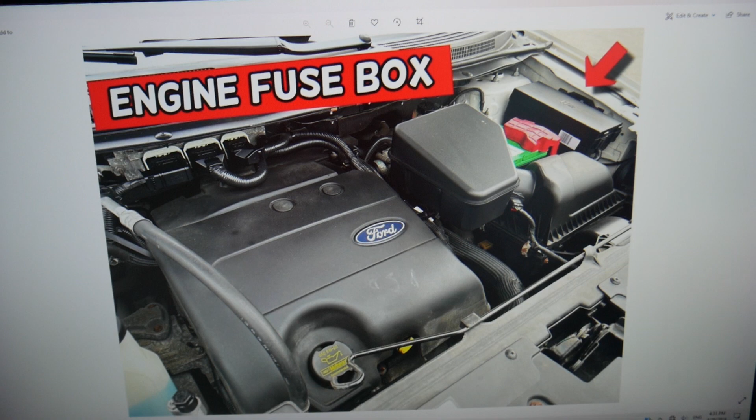For the crankshaft position sensor fuse, you need to open the hood. Once you open the hood, facing the engine on the driver's side, you see on the right side, that's your car battery. Next to it you have a fuse box. Press these two tabs, open the cover, and you're going to find a fuse box with a layout like this one here.

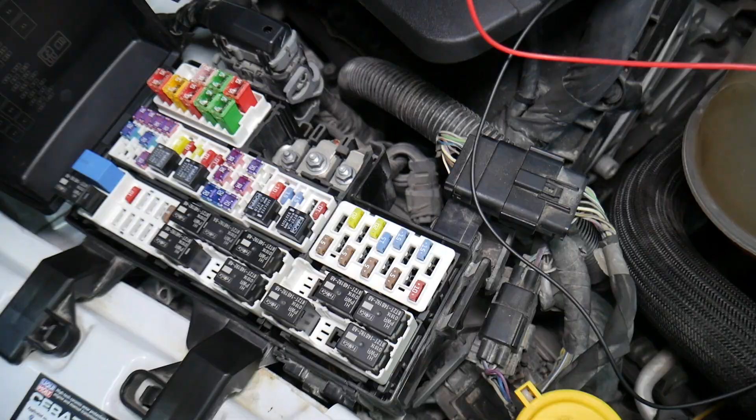Before we continue, let's explain quickly why it's always a good idea to test fuses and relays. Fuses, not often you can see if they're burnt or they're good. Sometimes they may seem perfectly fine, you think it's a good fuse, you put it back in, and you end up spending money and time on parts and problems that do not exist, when all you had to do was test your fuse, find out it's bad, replace it, fix your problem.

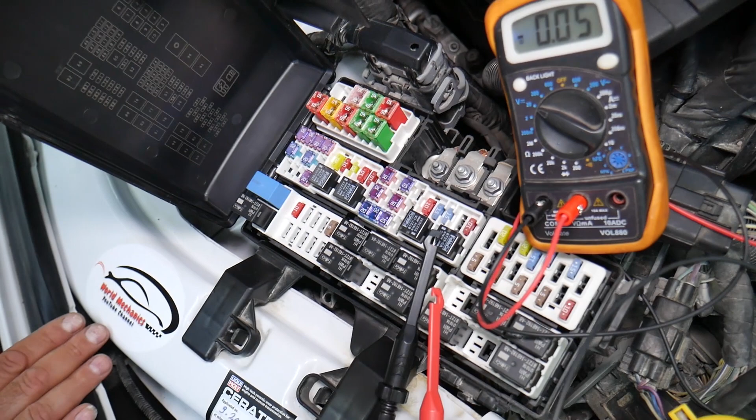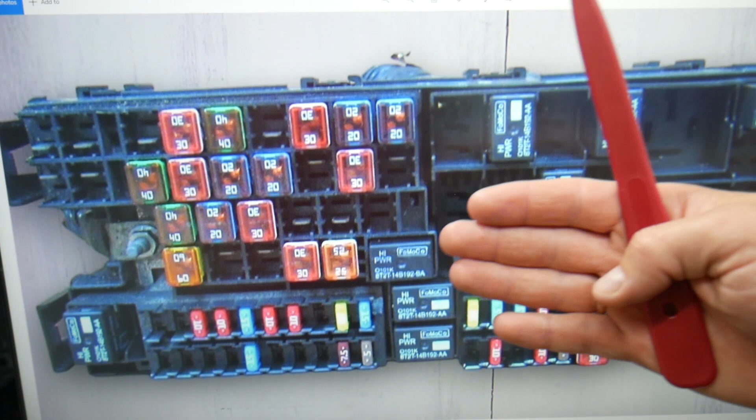If you want to see how to replace the camshaft position sensor or crankshaft position sensor on that generation Ford Edge, we have videos on our YouTube channel that will teach you that. Also, if you want to see how to test the camshaft position sensor or crankshaft position sensor, we have videos that will explain how to do that on a car. It's not very complicated. Multiple fuses will need to be checked. There is very limited information about that, but those are for engine functions and they will cover crankshaft and camshaft position sensor as well.

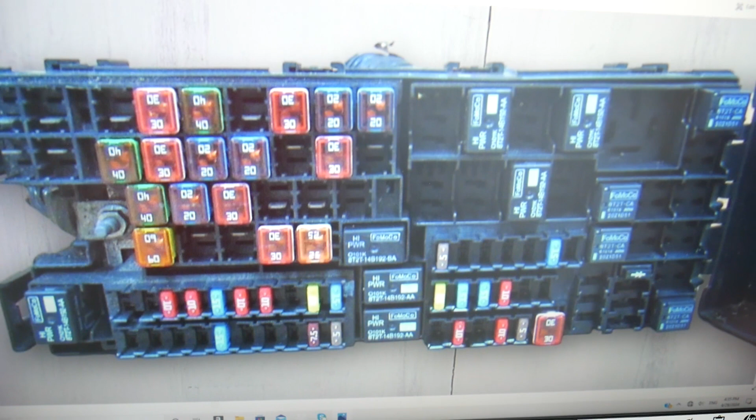So here, what we need to check: starting in this row, we need to check fuses 67, 68, 69, 70. Those are very important fuses here. Also, you will need to check fuse number 90, which is right there, this fuse, and fuse number 86 right there, a 7.5 amp fuse.

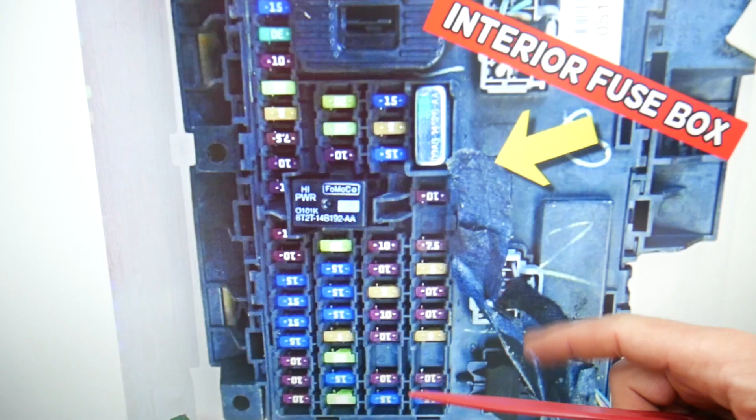Then you need to open the driver door and come under the dash. On the driver's side, under the dash, this is the footwell compartment, this is the parking brake pedal, hood open lever. Behind it you have a cover, remove it and you're going to find the interior fuse box. Here you will need to check one more fuse, known as fuse number 18. We're talking about that 10 amp fuse here, that's the one that you will need to check as well on Ford Edge.

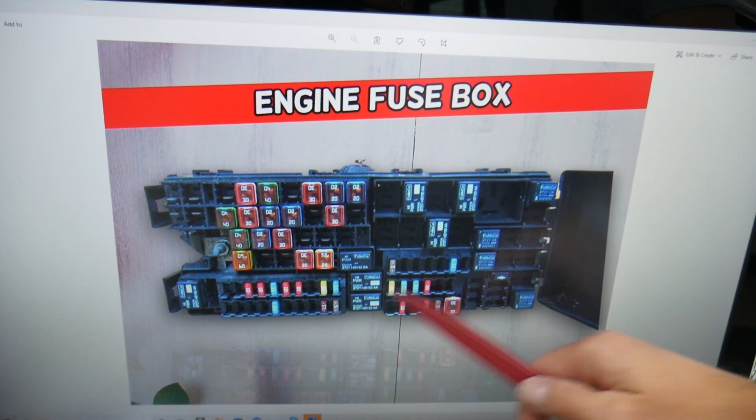So guys, this generation Ford Edge has all kinds of different fuses and relays. Fuses and relays that could be really hard to find, especially if you live in a small town, if you're in the middle of nowhere. One time we needed a replacement fuse, we couldn't get one, and as a result we were stuck there for a few days until the shipment came.